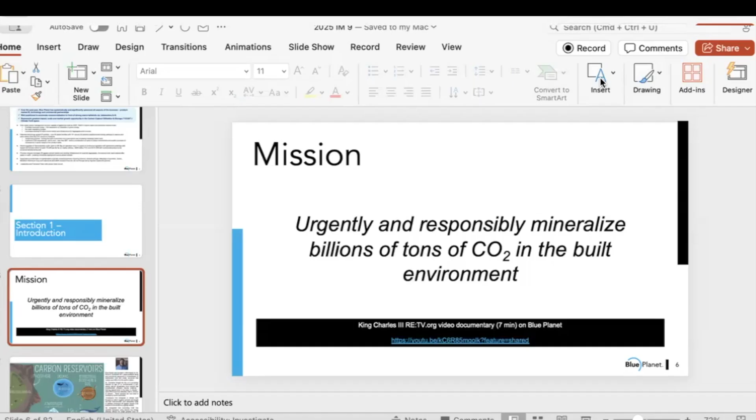I like to review the sort of basic facts of carbon because they're not really that well understood, but they're quite simple. If we look at carbon on Earth, there's about 830 billion tons of carbon in Earth's atmosphere. And just for reference, 6 million blue whales weigh about 1 gigaton. If you look in all the soils, all the terrestrial plant tissue, there's about 2,400 billion tons of carbon. If you go to the oceans, lakes, ice caps, rivers, there are about 38,000 billion tons of carbon in the oceans.

But if you go to the lithosphere, the upper crust of the Earth, there's over 100 million billion tons of carbon, and it's mostly in limestone. And that's where most of Earth's carbon is. As you can see, there's very, very little in the atmosphere. There's not much in all the terrestrial plant tissue and soil.

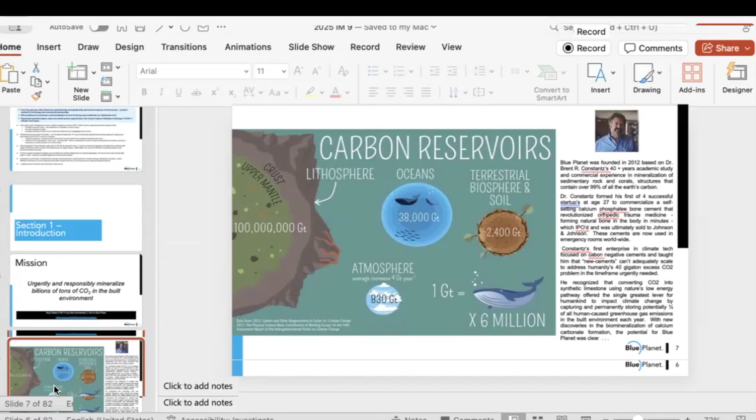Sorry, Brent, for the interruption, but could you make the presentation bigger, if you don't mind, so we could see it easier? Sure. Yeah, exactly. Oh, great. Thank you. Then it's easier to see it on the screen. Thanks. Thank you, Thomas.

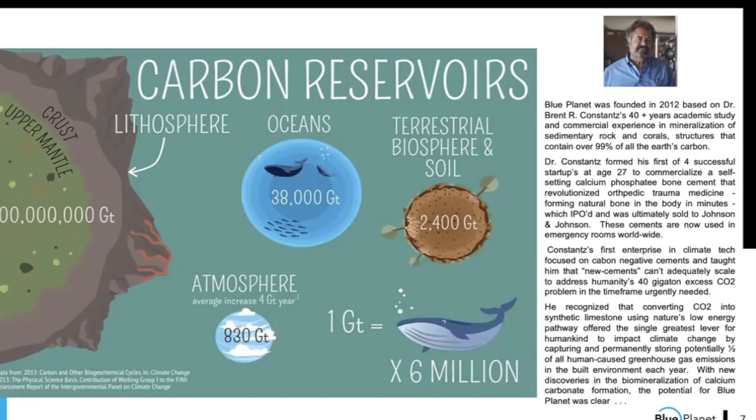I appreciate that. So this is the distribution of carbon on Earth today. And it takes many different forms. It's not all CO2. As I think most of you know, CO2 is a common form of carbon in the atmosphere, but more common is bicarbonate, which is what we find in water, like the oceans and groundwater. There's a number of complex organic compounds where a lot of biological tissue holds it, but it's not a lot. But far and away, most of Earth's carbon is in the form of carbonate, and it's a stable form of carbon, and that's what limestone is, calcium carbonate.

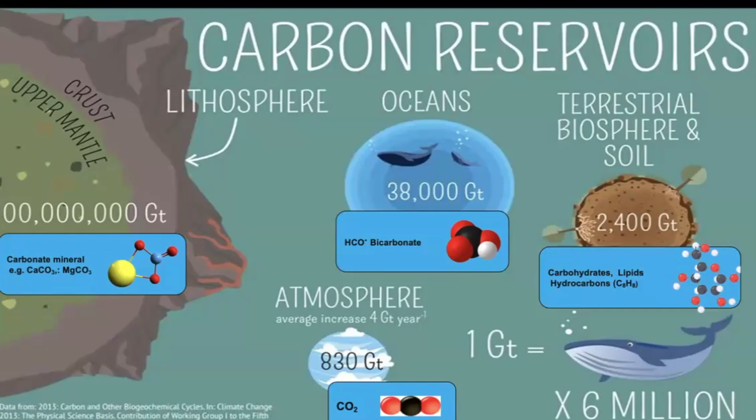So identifying it, if you look at the lithosphere, the 100 million billion tons of carbon are in carbonate mineral, mainly calcium carbonate. So that's already the most stable place for carbon to be stored on the planet by far. And the problem is fairly obvious.

If you take all of the efforts to mitigate carbon today, it's about 400 million tons or 0.4 gigatons. But the size of the problem is about 40 gigatons. So with all the efforts to mitigate climate change today, if you add them all up, they add up to a fraction of a gigaton, which means even if they were all implemented, they probably have no effect.

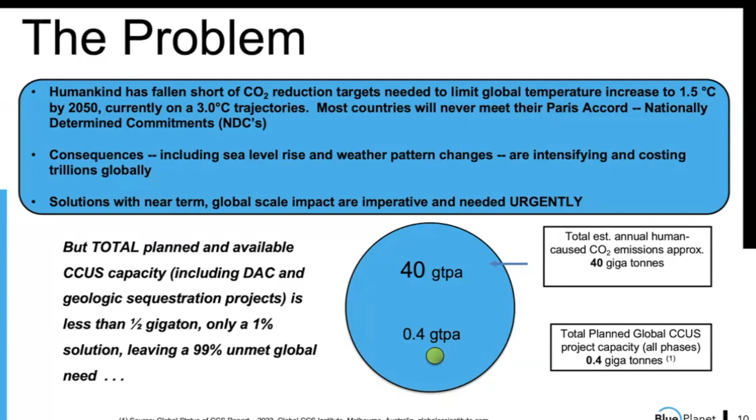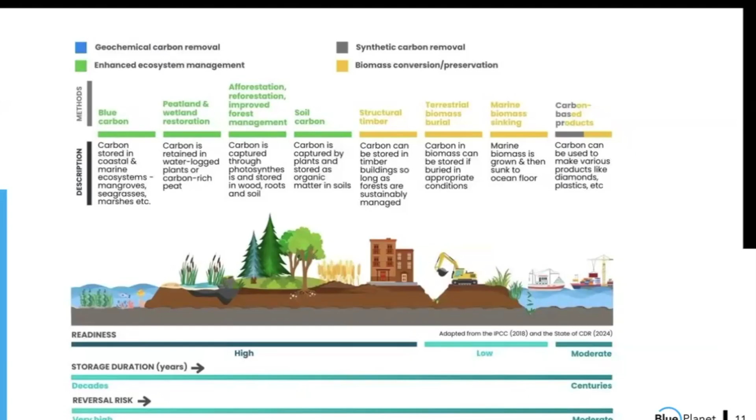And there's a whole host of solutions that people have looked at, from biomass to wetlands, and they're all important and they're all having an impact. But it's off by an order of magnitude. We're addressing what is a gigaton problem with kiloton capable solutions. So we're off by a few orders of magnitude in terms of the scale of our response to climate change.

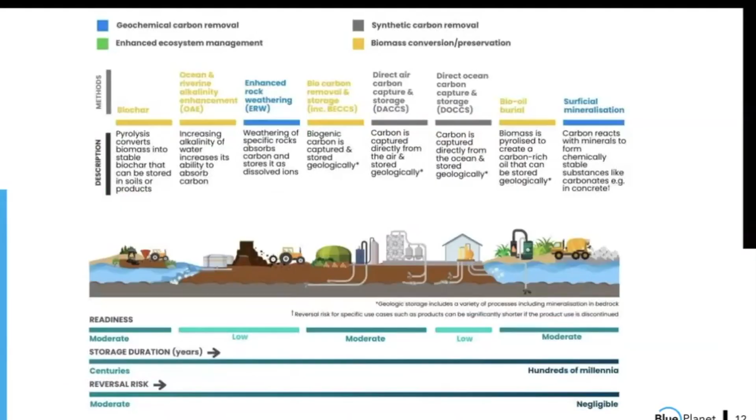And if you look at what's out there today, there's direct air capture. It's very popular. It's been funded by governments. But a typical direct air capture unit, the hope is to get up to maybe 1 megaton of CO2 from one unit. There's 1,000 megatons in 1 gigaton.

And in the world today, there's a handful of direct air capture facilities, and they're not even in the megaton range. They're in the kiloton at the best. And some are in single digits as well. And we know that because we've been approached by them because they have nothing to do with the CO2, really, and they want us to mineralize it for them.

There's a lot of different approaches to capturing carbon, in the form of CO2 to purify as well. But again, there's an issue about what to do with the CO2 once it's found. If we really want to get to megaton or gigaton levels, we need a major reservoir. Sustainable aviation fuel isn't going to make any difference, and it's not going to get us to gigaton levels of sequestration and these sort of things.

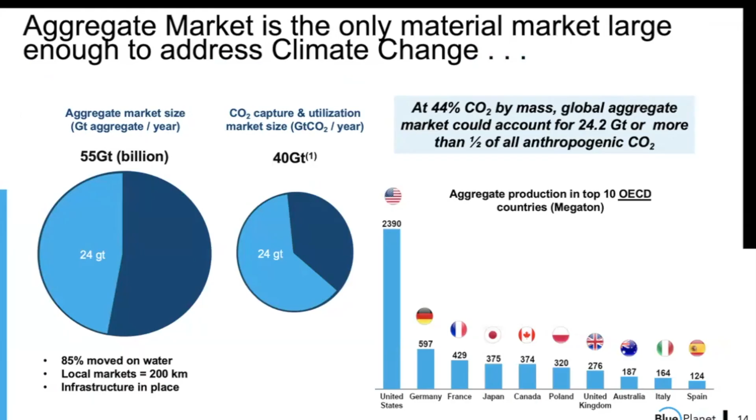And it's simply because there's over 50 gigatons of limestone mined every year, mostly for aggregate for concrete. And it's done in every place that humans are in the world. The aggregate is mainly used for concrete, it's used for asphalt, it's used for road base, but it's mostly limestone and it's mostly used for concrete.

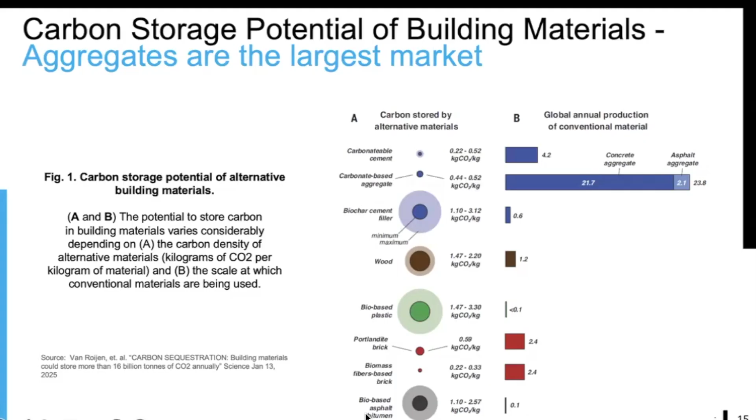Okay. Let's see here. Doesn't want to advance when I... Okay, sorry.

Here you can see the actual numbers. So there's approximately 10 gigatons of storage potential of carbon in concrete aggregate. So for reference, go back to the whale slide that I showed. There are 830 gigatons of carbon in Earth's atmosphere.

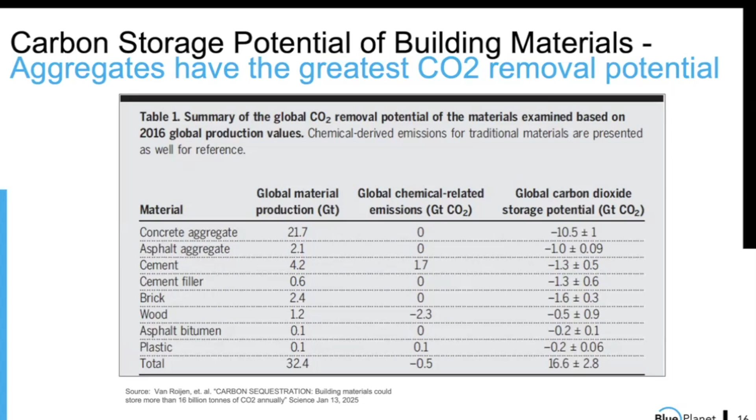But that's equivalent to maybe 2,000 gigatons of CO2. But humans are putting out 40 gigatons, and there's the capacity to store 10 gigatons in limestone alone. So we've taken another approach.

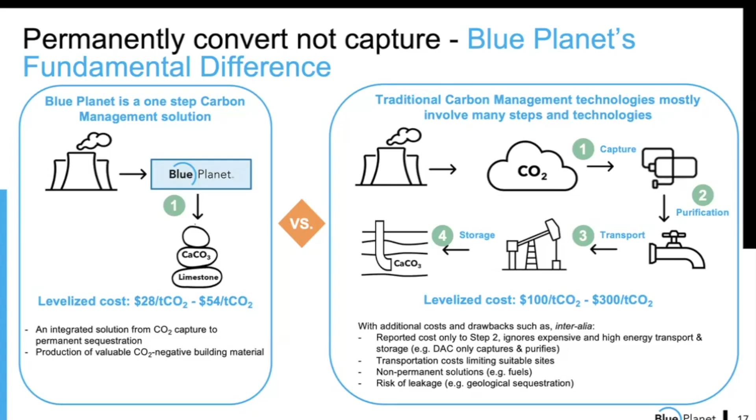And it's anticipated that it won't leak out. And this has been embraced by the petroleum industry because CO2 is used to push into wells to push more oil out. And so a lot of the government subsidies that are aimed at climate change are actually subsidizing the oil industry. Like here in the United States, Occidental Petroleum bought Carbon Engineering for $1 billion to capture CO2 and pump it into their oil fields to get more oil out. And they get a subsidy from the US government for doing that.

Something about what we do here also is we're able to completely change the way carbon is managed once it's captured. And it's hard for people to realize it, but the real challenging issues are not capturing carbon. There are many ways to do that. It's finding something to do with all that carbon once you have it and keep it from going back into the atmosphere. And we're talking about very large logistical projects.

But we have the ability, just like it's happening in the ocean in nature, to pump our capture solution through simple water pipes, not high pressure lines or anything, just simple water pipes out to a CO2 production location and put it through an absorber. And you may know a company called Sulzer, a Swiss company. Sulzer is one of our largest investors, and they build these large absorbers where you can put a liquid and a gas through and transfer the CO2 and convert it into CO3.

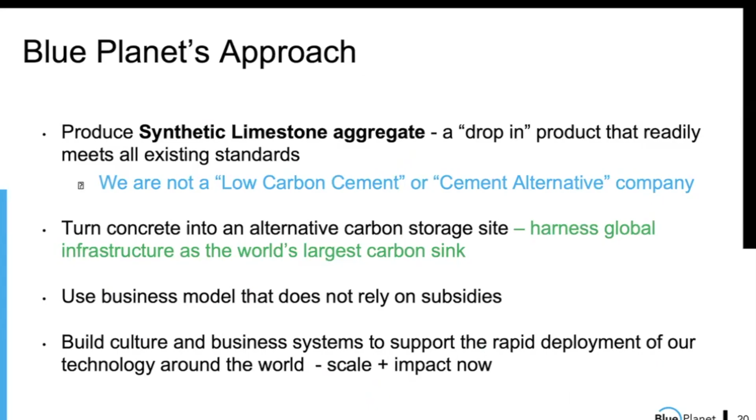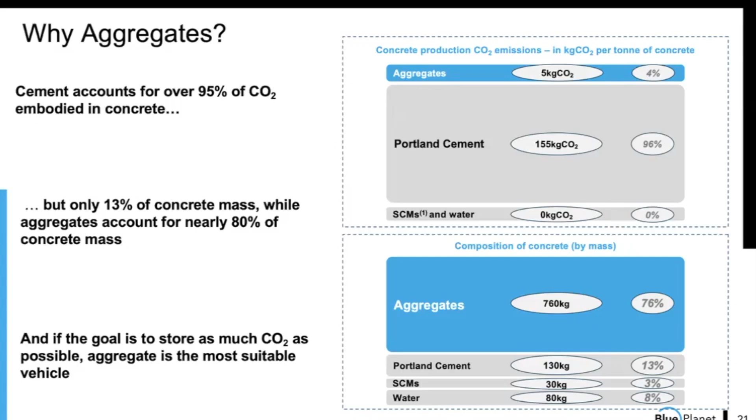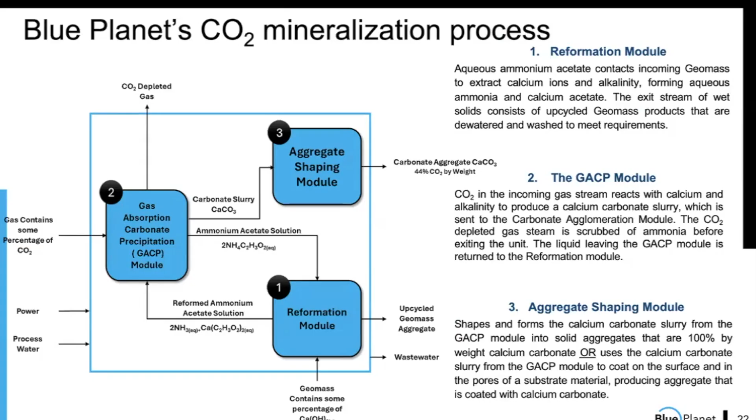We're able to use a broad range of CO2 sources. We're not really sensitive to any particular CO2 source. So, whether it's a coal plant or a natural gas plant or a biodiesel plant, they all produce a CO2 emission source we can capture CO2 from.

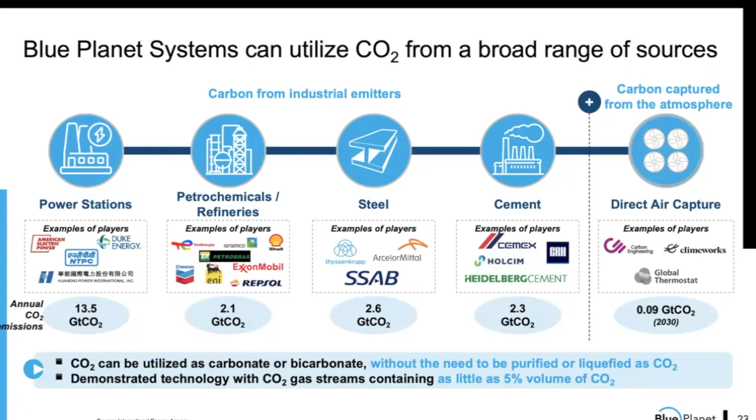And it's true of refineries, steel, cement. We've even mineralized direct air capture. But all of these add up to about 20 gigatons if we were to capture all of these. So there's a large potential.

And the calcium sources we use are also quite diverse and varied in our system. Currently in San Francisco, we're using returned and demolished concrete. We've used cement kiln dust, steel slag, fly ash from coal plants, bauxite from aluminum. They all have the calcium component that we need.

And what's interesting is what's left over is still usable in concrete as an additive to concrete. In fact, it's better because it cleans it up when we dissolve the calcium out of it. But we've also used native rocks that are high in alkalinity, igneous mafic rocks.

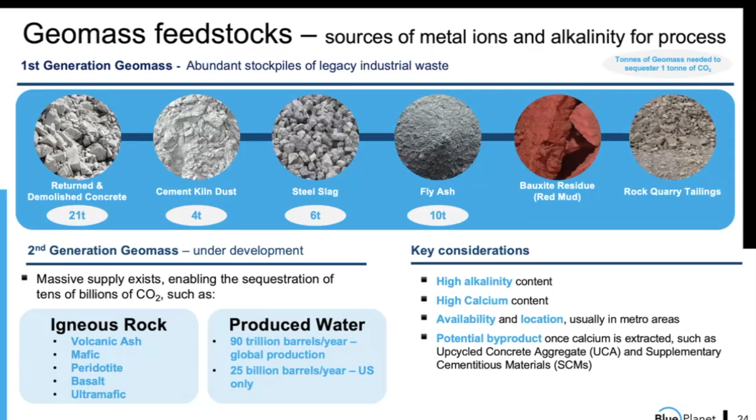We're using produced water in one location, which is the water that is produced when oil is pumped out of the ground. And most of what's pumped out is ancient seawater, not oil. And then they have the responsibility of managing that. And it's very high in calcium, typically high in alkalinity, and it's an unlimited raw material source.

But these are the three things we're producing in San Francisco: a normal weight aggregate, which is very common in concrete. A lightweight aggregate. We use this in Terminal 1 at San Francisco International Airport. It's typically used where you need lightweight concrete. And the sand that we produce is left over after we leach the calcium out.

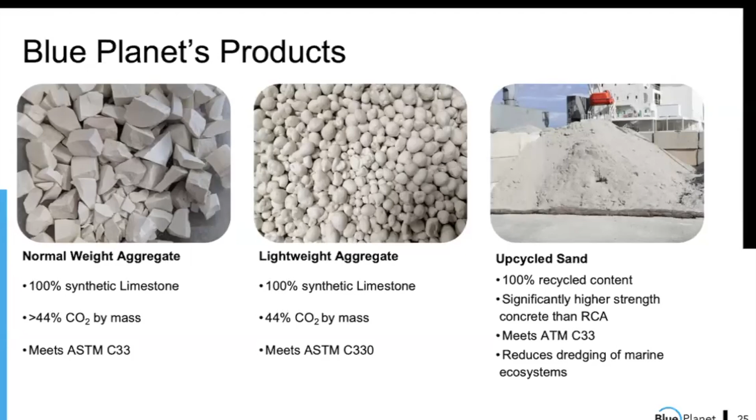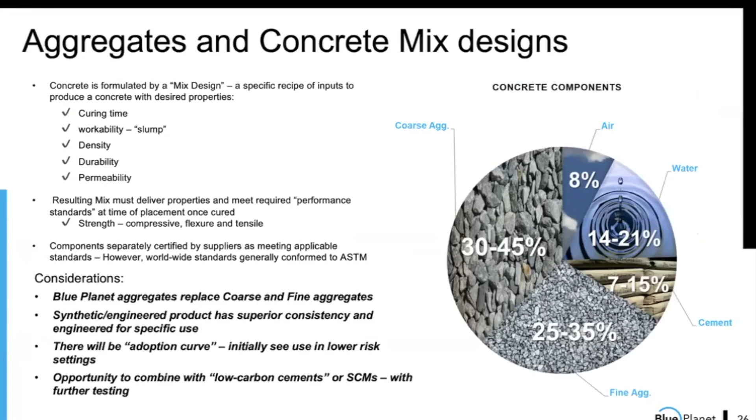So getting a little more into the concrete itself, there are a number of properties that we have to maintain in the concrete. Concrete's the most used building material in the world. And we have the ability to produce a carbon negative concrete. And we use this rating system called the Carbon Star rating system, which is now a North American ANSI standard on characterizing the carbon intensity of a yard of concrete.

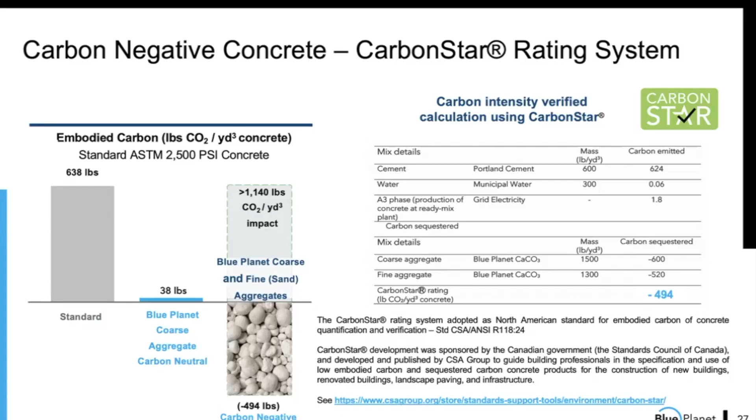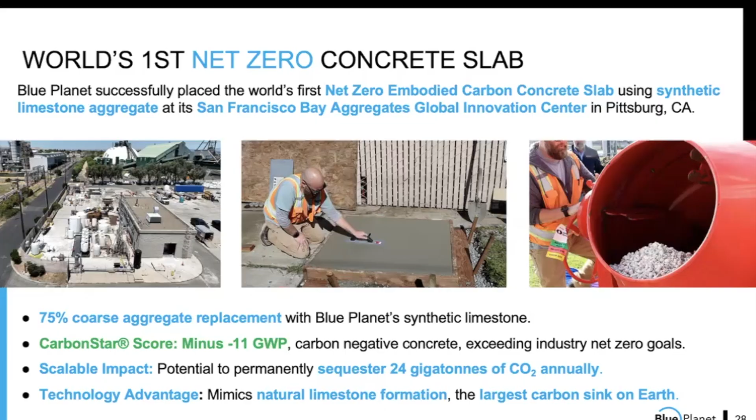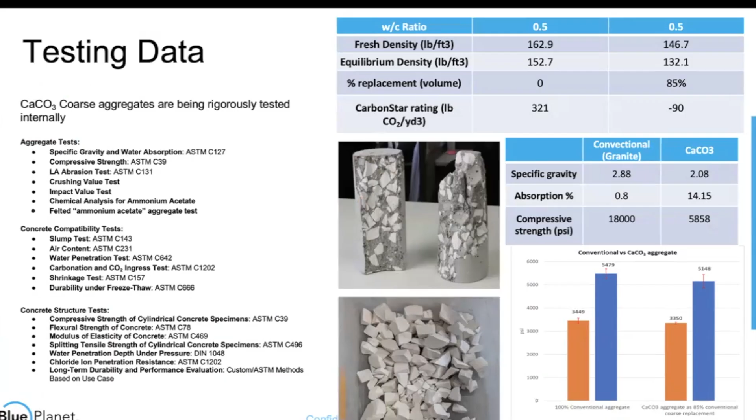We recently started pouring a new mix design where we're making the most negative concrete that's ever been made. And what we typically do when we do a new mix design, we pour a small slab so people can come and see it. But we do all the necessary regulatory testing on the concrete. You can see in these broken sections, the white is our aggregate, and the gray is the sand and the cement component of the concrete.

I'll just mention that because we're making it in a process that's quite akin to native biomineralization, there's an adaptation in the crystals that makes them highly reflective. And I'm not going to go into it, but there's a great interest in the architectural community in making highly reflective concrete to avoid the urban heat island.

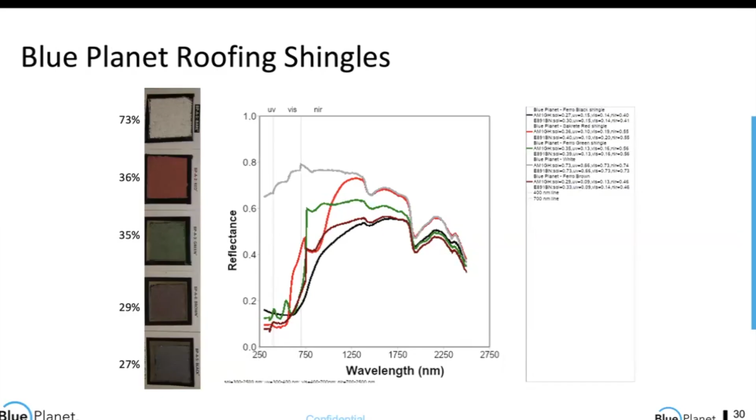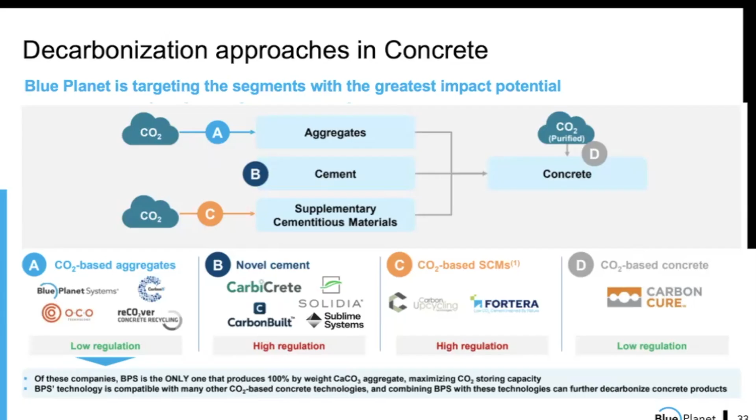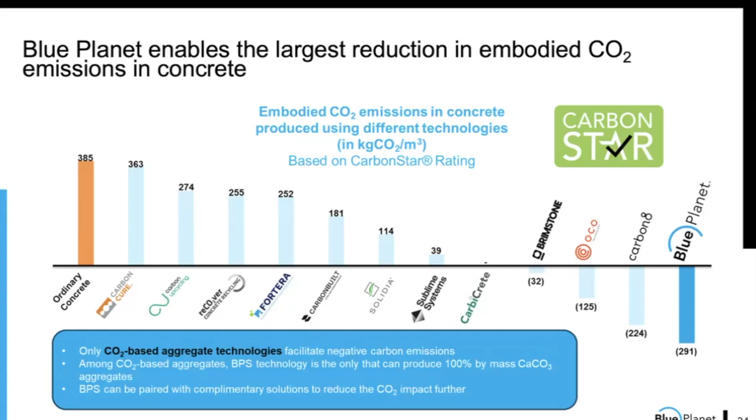And a lot of these processes only work if they're using renewable energy. If they use typical energy off the grid, they don't work at all in terms of the carbon. They put out way more carbon than they're sequestering. Others of them only work if they're given government subsidies, and most of the world will never have government subsidies, and most of the world is where most of the CO2 is coming from. So building a model dependent on a government subsidy, the idea is that'll stimulate new technology, but if it's a fundamentally unsustainable method, I'm not sure it's helping that much.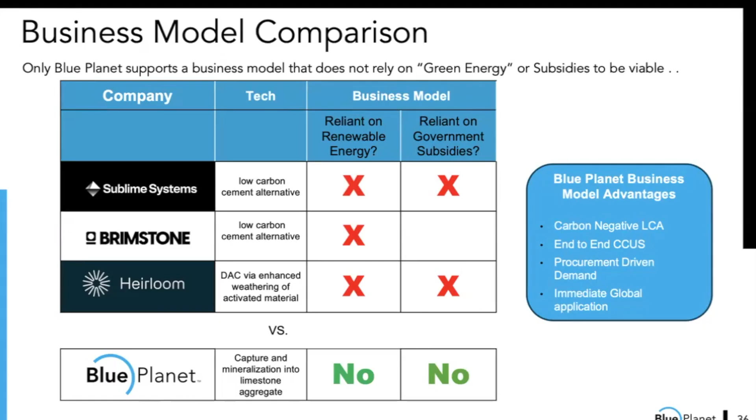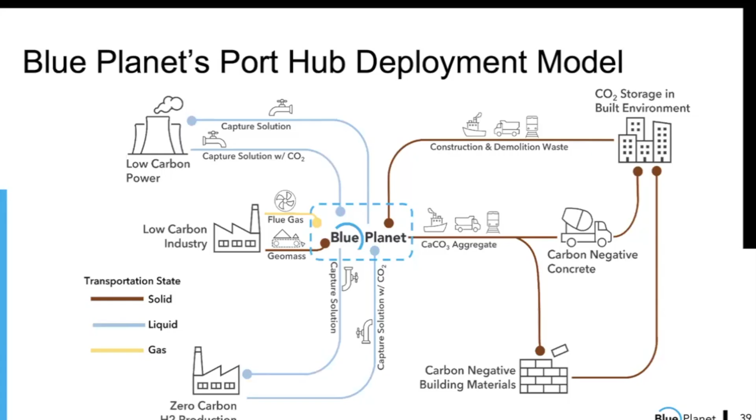So going back to our model, we're working on deploying this model around the world. And here's an example. This is up in Le Havre in France. And the reason Blue Planet has the potential to have such a large impact is not just because it's the largest market in the world other than water. It's that the existing infrastructure of mankind is well adapted to accepting this solution as a major solution for carbon dioxide. And this diagram depicts the same elements as this cartoon does.

Here you can see the yellow is existing CO2 producers. The blue is the Blue Planet solution being shipped around. And the red are solid materials which are already produced on site. And there are many, many of these sites all around the world. They're called pre-Panamax ports. And they've been there in some cases for centuries. And in many cases, they're not being used because they can't accommodate the big ships that are brought in now. And so there's an immediate opportunity.

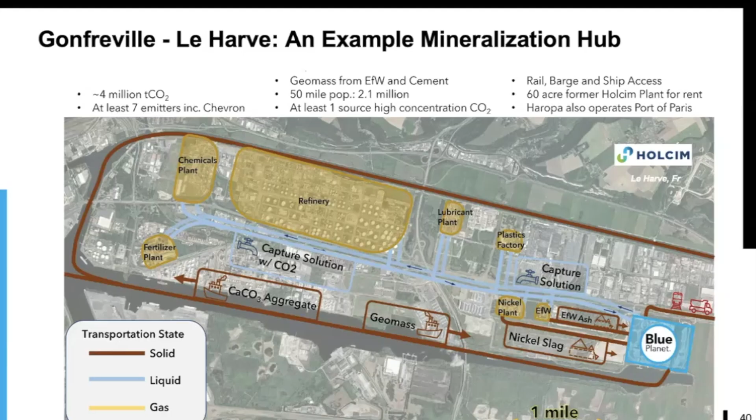So in a case where it might normally take a decade to get all the permits, everything lined up, in San Francisco we were able to get up and going in 18 months, which is a huge element. And this just depicts how we've been developing it over the last few years, where we're currently developing it. And we have a methodology where we send a team out to a location and we look at many aspects. Are the raw materials there? Is the transportation there? Is there a market for the concrete close by? And we're able to make the pricing of the aggregate competitive with regular mined aggregate as well.

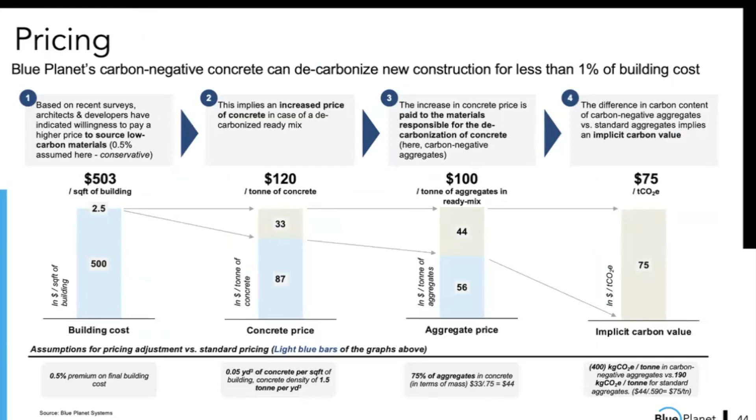Our basic approach is to go directly to the specifiers. So for example, at San Francisco Airport, the architects of the airport specified that they wanted Blue Planet concrete. And then the general contractors had to go to concrete producers that would accept the Blue Planet mix designs for the job. And if they didn't, they lost the bid. Normally what's done is, a project is designed, and the very last thing they do is go out and get the bids on the concrete, like a commodity. We're doing it just the opposite. We're going to the specifier and owner first.

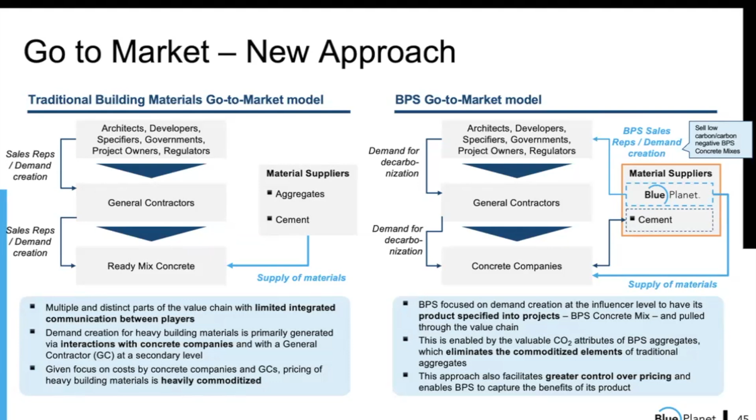And here's an example. This is San Francisco Airport Terminal 1. The airport put in the specification that they wanted carbon negative Blue Planet aggregate in their concrete. The reason I bring that up is what's different about this is it's money already being spent. The airport was already going to buy 1 million yards of concrete. So this is a way that governments, poor and rich, can use their procurement power to save the planet.

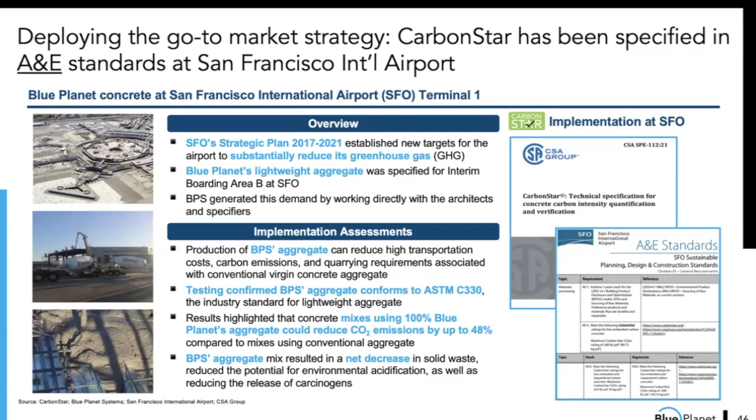Because by the airport specifying a carbon sequestered aggregate, that resulted in thousands of tons of CO2 being permanently sequestered in the airport. But it was money they were already going to spend. So rather than an offset or something else, this fits right in with the economics of what they're doing anyway. May I ask, how much did they have to pay on top of the usual concrete they would buy alternatively? Nothing. I mean, we could easily charge a premium though.

The large companies in our neighborhood, we've got Google, what was Facebook, Microsoft, companies that are building very large data centers right now. And we could charge 100 times what we're charging, they'd still pay it because they're very concerned about their carbon footprint. But no, we're not charging anything above market price.

The way it goes is it goes from our plant to the ready mix plant where the water and sand is at, and then it's transported out to the job site. So there's a long chain there. There is also a voluntary carbon market that is something we're planning to participate in, although we're not fully dependent on it. But anyway, this is what the specification at the airport says.

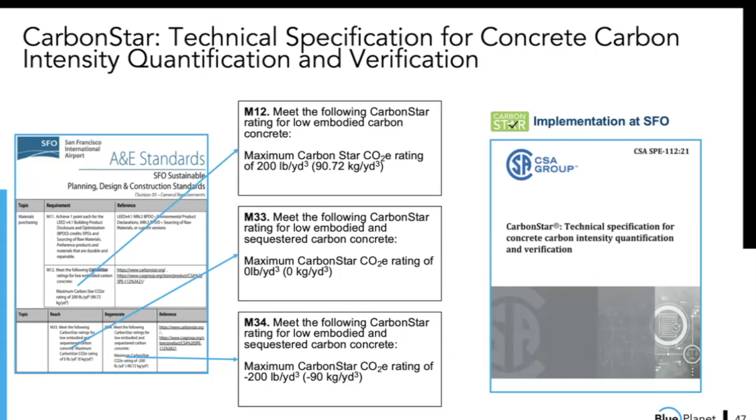To bid on the job, at the very minimum, the concrete has to have a carbon intensity of 200 pounds per cubic yard. A regular yard of concrete, 600 pounds. So it's already 1/3 of what you would normally anticipate. But then they have another requirement that it be 0. And even a third one where it's negative 200 pounds per yard, which is negative 90 kilograms per yard. And that one will always win the bid, even if the price is similar. This is how they competitively win the bid for the concrete.

California leads the United States and maybe the world in a lot of these policies. And we're currently crafting a number of different bills and policies in Sacramento, our capital, around embodied carbon, procurement, incentives, cap and trade that we have on mineralization, and a number of others. And it's very common, and I can cite many different legislations globally that were first drafted in California and implemented. And so this is where we believe things are going.

Like I mentioned, there's a very large voluntary carbon market out there right now, which we're also participating in. But we've also won the endorsement of virtually every concrete organization we've talked to, from architectural firms to a group called iMasons, which is a collective of all the large data center builders led by Microsoft, and they're very concerned about the carbon produced by the electricity running the data centers, as well as the carbon produced from the concrete used in the data centers.

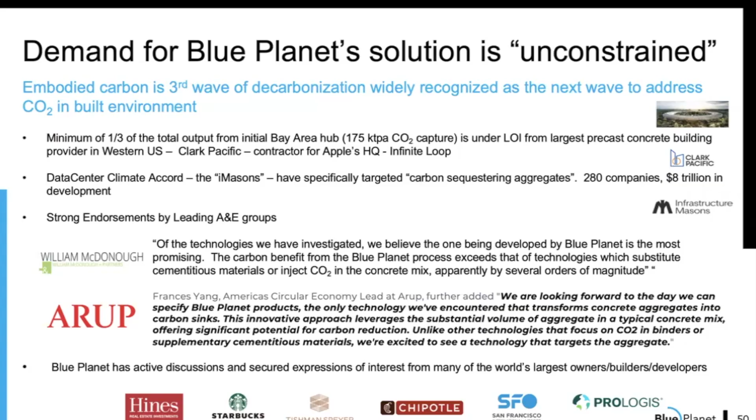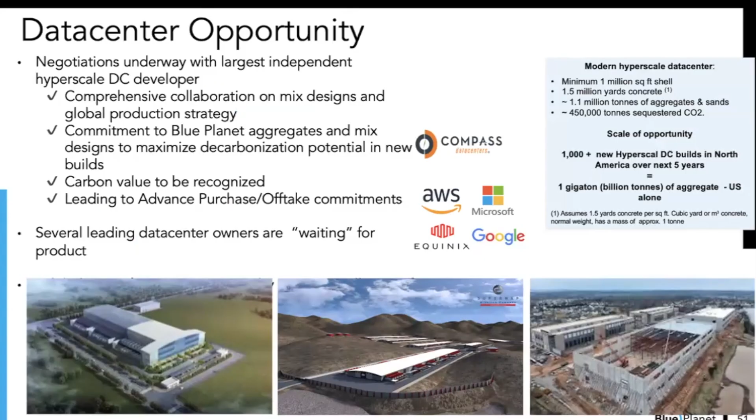And this is a possibility to, when you first build a data center, actually have a net carbon negative. And then over the operational history of the data center, to work away at that carbon bank account, so that the net carbon intensity of the data center over, say, a 3 or 4 decade lifetime would never go above negative. It would stay negative by being amortized over the many decades and alleviate the whole problem. And so we're working with these groups to develop mix designs and trying to fund them with advance purchase commitments.

We've worked with a number of different CO2 producers and people in the field, from oil companies to cement companies to large industrial companies to concrete ready-mix companies to equipment providers, biofuels refineries, aggregate companies, energy companies. So we have a large network of people interested. But the question is, how do you go from where we are at the kiloton scale up to at least the megaton scale? How do you actually do that? And it requires a lot of modeling to really start to understand that.

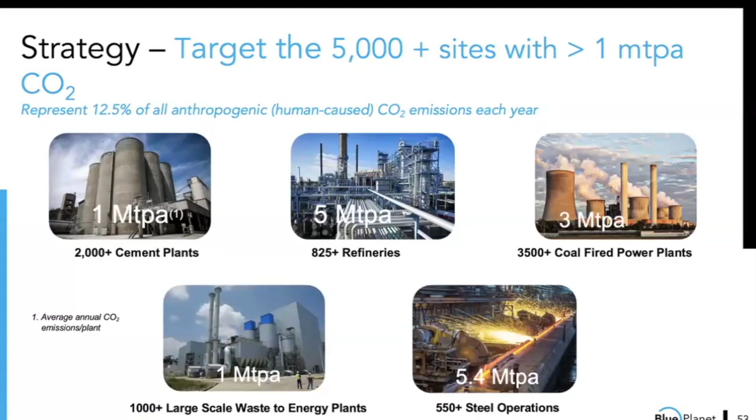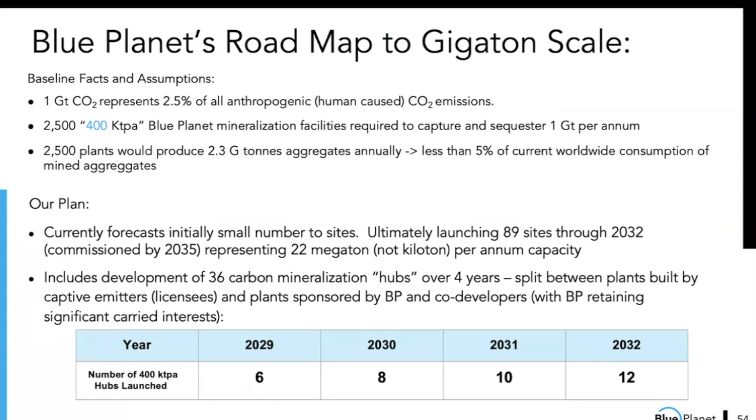But here are different sources of CO2 and the average amount of CO2 coming from these different sources. And we make certain assumptions. We're assuming these plants are about 400 kilotons. And we've been approached by engineering firms all over the world that want to build these plants at their clients. And so we're working with large energy engineering firms, different feedstock providers, carbon emitters. We financed our whole plant in San Francisco, for example. But these are the groups that are approaching us.

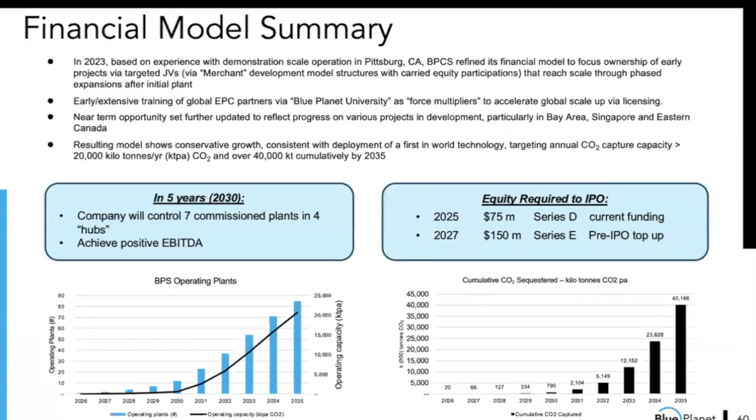We've got a number of patents, and we're looking at what it's going to take us to get to our first gigaton of sequestration and how it will look over 5 years. We've assembled quite a management team of people that have worked for me in some of my previous companies that I have a long history with. We've got an amazing set of advisors that are helping us in the various different areas. And I think that's it.